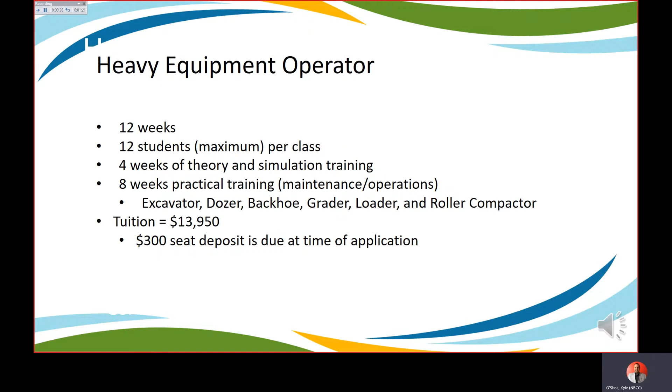Aside from the tuition of $13,950, students will need to incur the additional cost for mandatory personal protective equipment required for the practical training. These items include CSA-approved steel-toed boots, hard hat, safety vest, and protective eyewear. Be mindful as well that a rain suit and appropriate outerwear such as coveralls will also be required for work outside in the elements at the worksite.

The Heavy Equipment Operator Program is a certificate program. Upon completion, graduates will receive an NBCC certificate and can attend the official graduation ceremony in June. Additionally, students will receive a transcript of marks, operator wallet card, first aid certificate, transportation of dangerous goods wallet card, and WHMIS safety wallet card.

The intent of the program is to prepare students for entry-level positions in heavy equipment operation. A large portion of the program involves practical training on simulators and operating the equipment, with additional training with respect to transit work, basic repairs and maintenance, industrial safety concepts, safety, and environmental legislation. Weeks 1 to 4 involve theory and any classroom or simulation training. Weeks 5 to 12 entail practical training in the field on all 6 pieces of equipment.

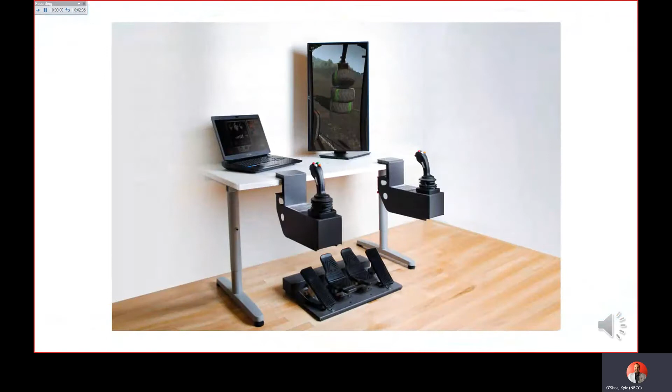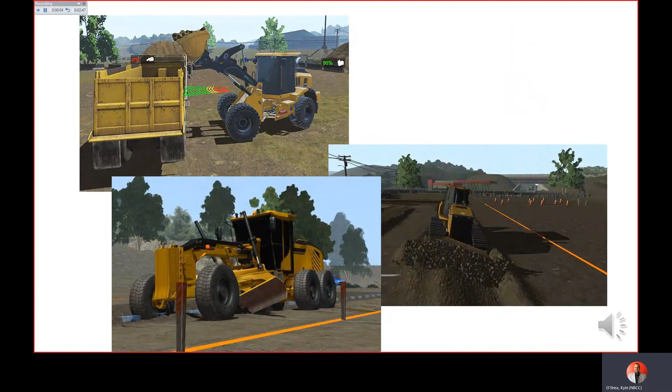This is a picture of our simulation equipment that students will use during the course, along with sample screenshots of various training exercises. The software includes exercises for practicing on all 6 pieces of equipment, the same equipment that will be used for the practical training with similar learning competencies. The controls are very realistic, and it helps the students gain the hand-eye coordination necessary for when they actually start operating the real equipment.

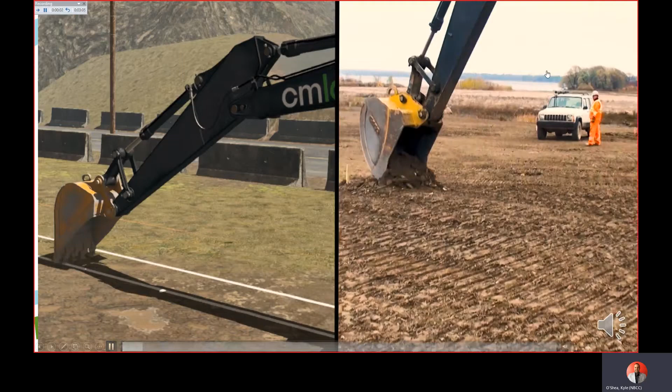The simulator training minimizes damage to the actual equipment during the training process, as it allows students to get the feel of the controls and basic procedures before they even sit in a machine. This short video clip demonstrates how realistic the simulation equipment really is.

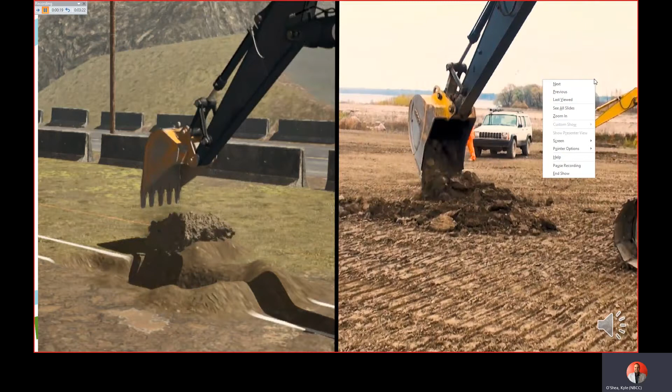Before discussing the career opportunities and application process, I would like to play this short video which depicts an overview of the training program with footage from a delivery in 2018. It also includes a short clip of our valued partner, Tom McGinn, Executive Director of the New Brunswick Road Builders Association, describing the labor market and overview of the industry.

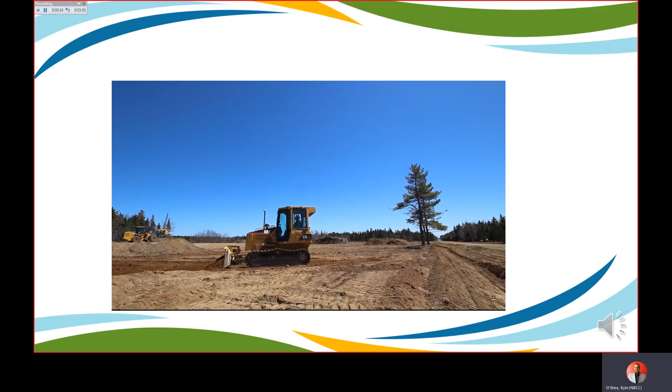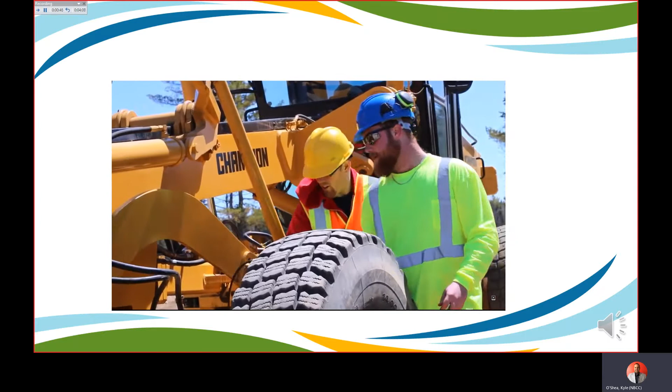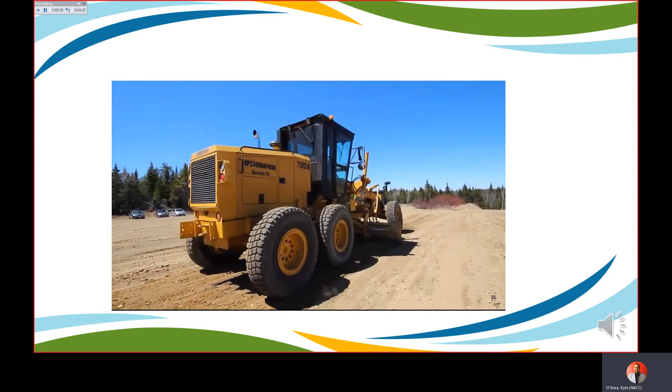Here, this area, we're in Neguac, New Brunswick. Everything that you see here is being built by students. It's a 12-week program. We start over in Miramichi for 4 weeks, and then at the end of the 4 weeks, we moved on to Neguac for 2 weeks of maintenance in the shop, and then the 6 last weeks, we're here in the field doing work with equipment. The 6 pieces, it's a loader, backhoe, excavator, grader, a bulldozer, and the roller compactor.

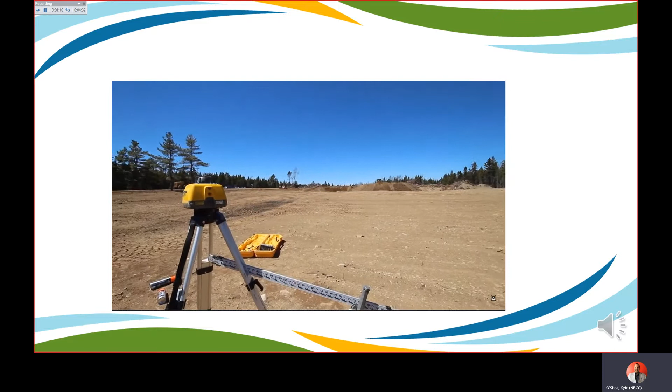Our members do the majority of road work in the province. That goes from as big as constructing the 4-lane highways in the province to as small as doing pipe culvert work. We're finding a lot of the operators are either at retirement or approaching retirement age.

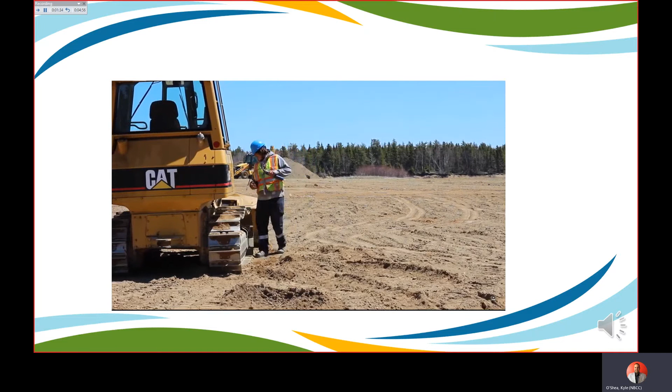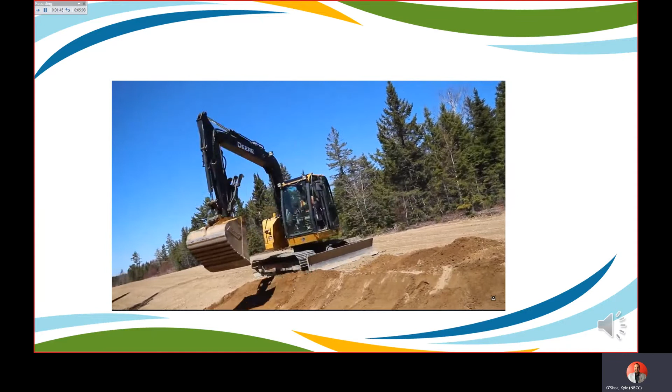So there's going to be a huge demand, and I'm not just talking the next 4 or 5 years. I'm talking out the next 20, 25 years. The roads, they continually need to be upgraded, paved, and when you're upgrading, you're into earth moving, equipment, and so heavy equipment operators are going to be required for there. Anything that we see where there's a demand within the industry, we've worked in conjunction with NBCC and have been very happy. I know our members are happy with the graduates that come out,

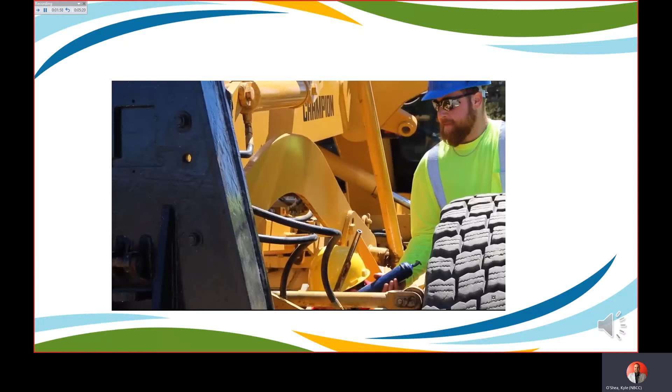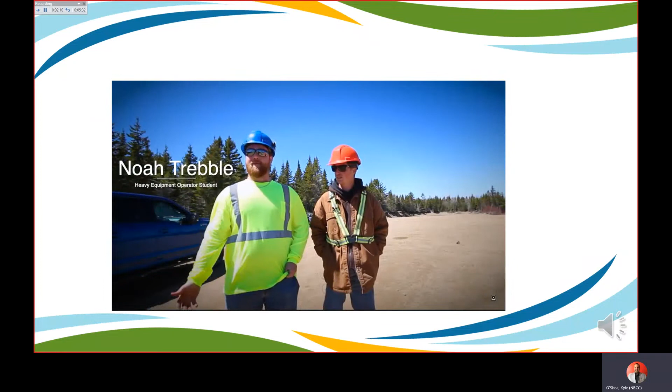that they're well trained and ready to step in. I all started in the heavy equipment kind of industry with my grandfather running an excavator and loader and stuff like that since I was really young. And then now that I'm 19, I thought, it's about time to go to college and get something underneath my belt.

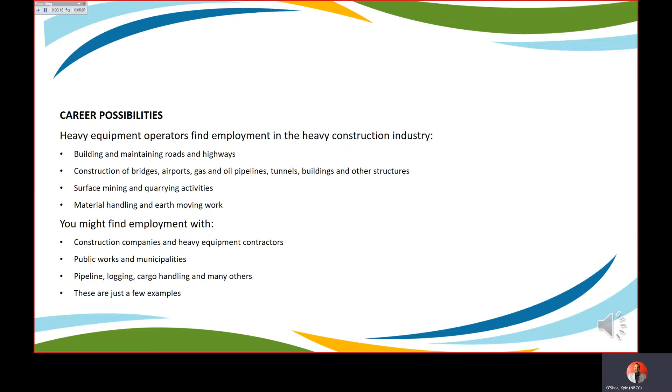As mentioned by Tom again in the video, there is currently a strong labor market need for heavy equipment operators in New Brunswick. With an aging workforce, there will continue to be a demand for operators for years to come as operators retire from the trade. Graduates may find work with construction companies, public works and municipalities, pipeline and logging contractors, and cargo handling companies, just to name a few.

A starting wage for a new operator would range from $18 to $22 per hour, with experienced operators earning anywhere from $25 to $50 depending on their experience, job role, and certifications earned. Heavy equipment operator vocation is aligned with provincial and interprovincial apprenticeable trades. The three pieces of equipment that are interprovincial Red Seal trades include the excavator, dozer, and backhoe.

For more information on the certification process, please contact Apprenticeship at 506-453-2597 or check out their website at gnb.ca/petl.

Following successful completion of this program, the student will be able to identify safety hazards and minimize risk, operate a dozer, excavator, grader, bucket loader, backhoe, and compact roller safely according to set specifications, perform basic repairs and preventative maintenance on heavy equipment, identify opportunities for improvement and quality assurance, comply with environmental protection legislation and regulations, and work independently or as part of a team.